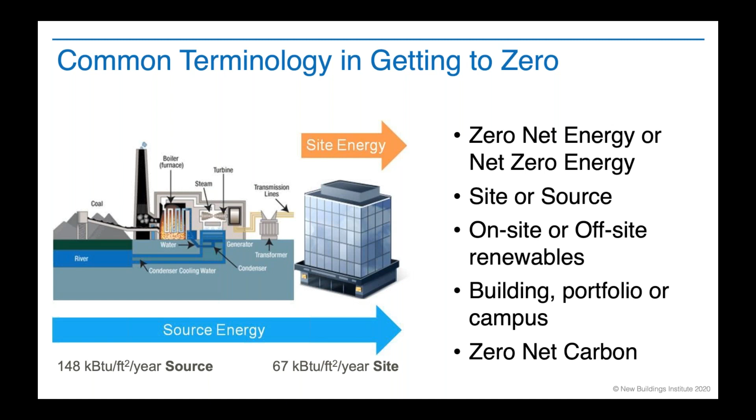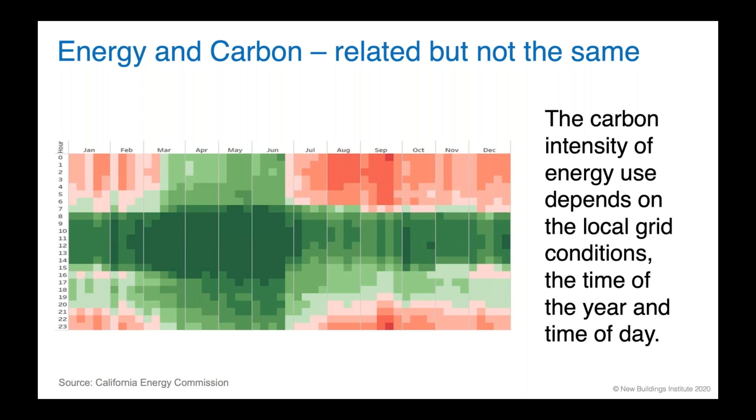The other thing that is important to know is that it's kind of a changing equation, because as utilities add renewables, especially renewables at the utility scale, it's going to continue to change the carbon intensity of that grid over time.

An example of this is shown in these two separate heat maps, one for a grid in 2020, and another for a predicted grid in 2030 if all the renewable portfolio standards are purchased out and the utilities do add the renewables as required. You see that in the top graph, the red is replaced with black, and there's still a fair amount of time with heavy carbon intensity on the grid. That will change over time, so this is going to continue to evolve and be a very dynamic thing.

But what we understand, and what research has consistently supported, is that energy efficiency continues to be a very cost-effective strategy that should be pursued in buildings. That's because, one, it makes the cost of renewables less, since you have to purchase less renewables. But also because of what in the utility efficiency industry has been called non-energy benefits.

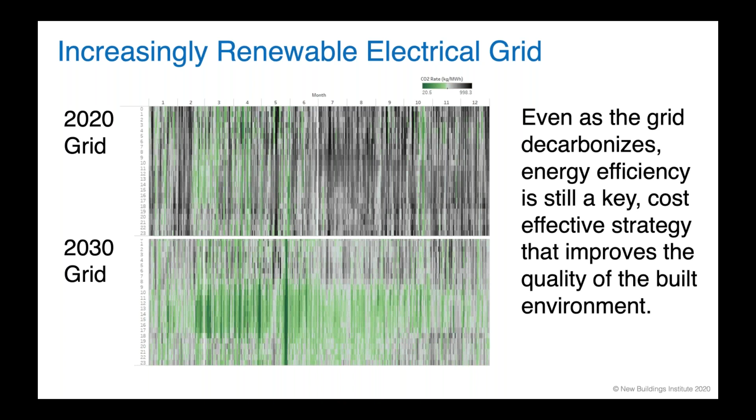So that was thinking about fuel consumption on the electricity side. But as we transition this conversation from zero energy, thinking about all fuels, to thinking about zero carbon, we want to think about the use of natural gas in buildings - that's an important thing to consider. Natural gas is primarily used in heating and hot water heating, and where it's used depends on where you are in the country, because it does vary by place.

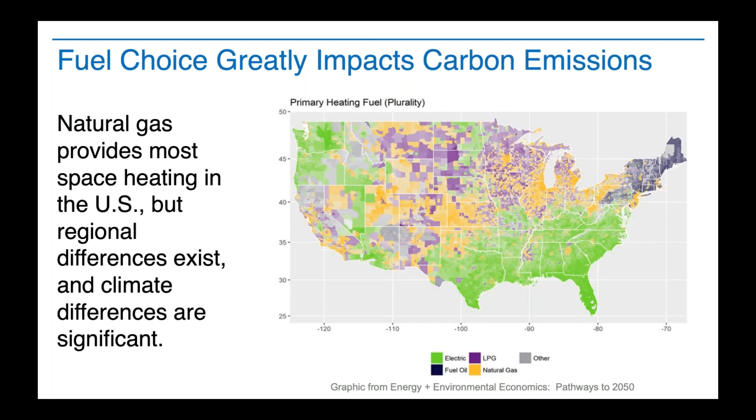In schools, if you think about where gas is used, it's a lot in boiler systems and space heating, but we also see natural gas use in kitchens, and that's another primary use that has to be considered in school districts.

So we wanted to take a quick look at some codes and policies in California that are really driving towards this decarbonization. California has a goal to decarbonize the building sector, and that goal is coming up pretty quickly.

They started back in 2008 with the California Energy Efficiency Strategic Plan, which set out goals to have all new residential zero energy by 2020, new commercial by 2030, and half of existing buildings being zero energy by 2030.

And to the California Energy Commission's credit, they set out the goal in 2008, and lo and behold, this year residential Title 24 really did take the residential energy code and require zero energy. They're marching along on this path to improve the energy code every 3 years until it does achieve zero energy. But like I said, energy and carbon are somewhat related, but not the same.

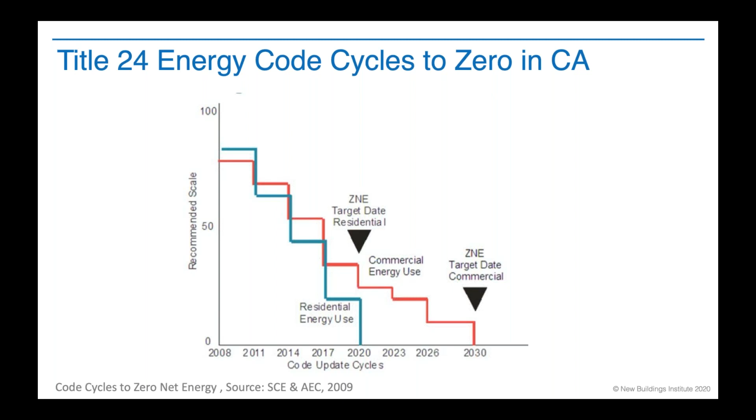So there are other cities within California who are moving even beyond Title 24. I've invited Sean Denniston, Senior Project Manager from New Buildings Institute, to talk about the San Jose REACH code, the electrification REACH code, which has requirements that will impact new school construction. In fact, all new construction, but it's important to note that some of what he'll discuss is really only about new construction. So Sean, I'm going to pass it off.

All right, thank you, Amy. So we're going to talk about San Jose's electrification REACH code. A REACH code is a code that sits above the base code, in this case Title 24. It includes a set of requirements that go beyond that code, but they are still requirements—everyone needs to do them.

In San Jose, the electrification REACH code is really a policy partnered with something else San Jose is doing, called a community choice aggregator. What it means is that all of the electricity provided to San Jose this year will be from carbon-free sources. That means electricity carbon consumption has been rapidly and drastically reduced, leaving the only carbon consumption in buildings in San Jose coming from natural gas. So the REACH code looks beyond efficiency, getting buildings to go all electric to leverage the carbon-free electricity available in San Jose.

I want to make a couple of points about the REACH code. There are a whole bunch of requirements that apply to all building types, and some requirements you may have heard about won't apply to schools—we're only going to talk about what applies to schools today. The other thing to note is the REACH code only applies to new buildings, not additions or alterations on existing buildings. Only new buildings. You don't need to worry about this for renovations or retrofits, even major renovations to schools—only new buildings.

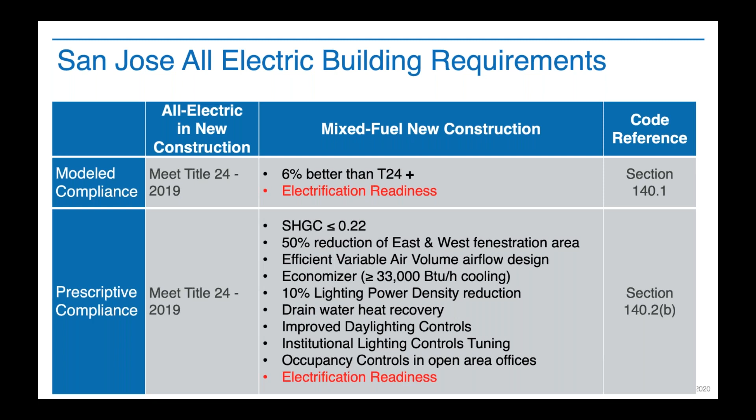So it really is just stepping up all kinds of building features. In addition to the efficiency, a mixed fuel building would also need to be electrification ready. What this means is that everywhere there is gas equipment, there also needs to be the electrical wiring to replace that gas equipment with electric equipment.

So here are two examples. These are from what you might see for a dryer, which you're probably not going to see much of in schools, but this is a good illustrative example. You have the gas line for the gas dryer, and then you have the plug with a circuit that goes all the way back to the electrical panel and all of the capacity at the electrical panel. So this is enough electricity available to power an electric dryer in the future.

This would apply to all kinds of gas loads, whether they're cooking, water heating, space heating, that all of these would have to have the electrical infrastructure in the building, the wiring, the capacity available to replace that gas equipment with electric in the future.

So you can see how these two pieces together, both the efficiency and the electrification readiness, give a really strong incentive to buildings to go ahead and electrify. And in the case of schools in San Jose, electrification is actually fairly straightforward because most of the loads in schools are relatively straightforward to electrify.

And in most cases, and schools are one of these cases, it's actually cheaper to build an all-electric building than it is to build a mixed fuel building, because once you take out those gas end uses, you can take out all that gas piping and that gas hookup, which means tremendous amount of cost savings upfront for schools under construction.

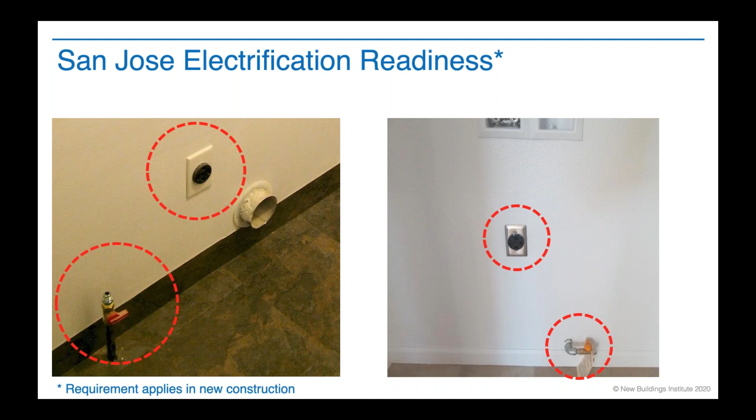Now, the next part of the electrification reach code is the electric vehicle charging infrastructure requirements. Again, these only apply to new buildings. So if you're doing a renovation in your parking lot, you might want to think about this, but you're not going to be required to do this in your parking lot.

Now, to talk about the requirements that are in the REACH code, we have to do a little bit of terminology first, because there are different kinds of electric vehicle spaces, and these are really meant to serve different purposes. The first kind is called an EV capable space. This is really just conduit that goes from the space to the electrical panel and a little bit of electrical capacity reserved at the panel.

This is a really forward-thinking requirement, that this is to avoid the future costs of an EV retrofit. Because if you think about adding electric vehicle charging to an existing parking lot, the biggest expense is actually retrenching the parking lot, tearing through your asphalt, digging trenches, and laying the conduit, putting everything back afterwards. So EV capable spaces are really looking at the future.

The second type of EV space is called an EV ready space. This has the actual wiring between the panel and the parking space. It terminates in either a junction box or a plug. And again, the capacity at the panel is reserved so that the charging can take place in the future. This would allow someone to come in with their own portable EV charger and plug it in. This is something that we see mostly in residential. This is not something that schools are really going to need to be concerned with.

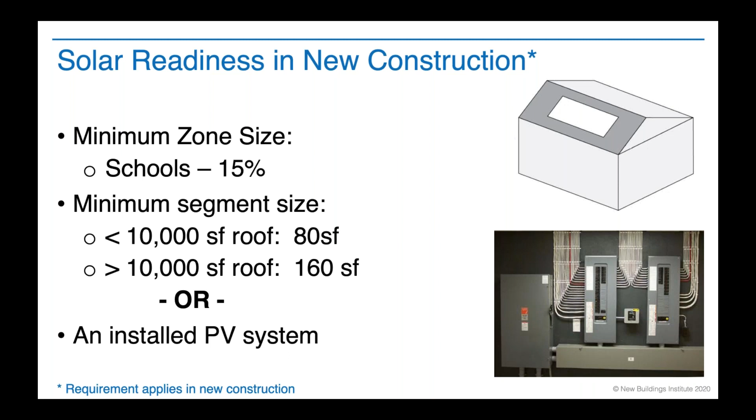Thanks, Sean. Okay, so with that quick intro to what the electrification REACH code is in San Jose, we're going to talk a little bit about the process that school districts are taking to get to zero over time.

So Rocky Mountain Institute dubbed this idea of zero over time, and really what they're talking about is this long-term strategic approach to energy management, one that sets measurable goals and then establishes policies and policy guidance documents to help achieve those goals. And we also know that in schools, it's really important to dovetail this long-term strategic plan with the focus on the benefits to the learning environment.

Because I know it seems obvious to say, but schools are about educating students. So we need to make sure that any work we're interested in doing to improve the energy performance, the carbon emissions reduction, that has to be integrated into the improvements to the learning environment.

Next slide. We have learned in our research that every successful project, every successful district has a champion. It is one commonality of all the zero energy projects that we know about. Oftentimes the zero hero, if you will, is on staff, but it doesn't have to be on staff. It can be a trusted consultant, whether that's a construction project manager or an architect, but we do know that there's someone there, and that someone is there to help establish goals and then to defend those goals and make sure that they're being considered all along the process.

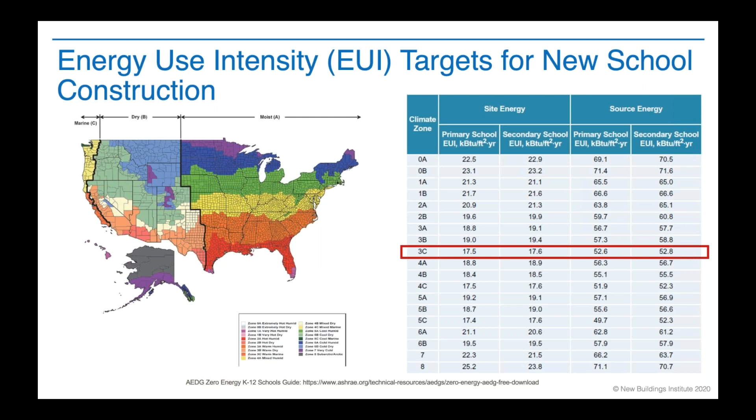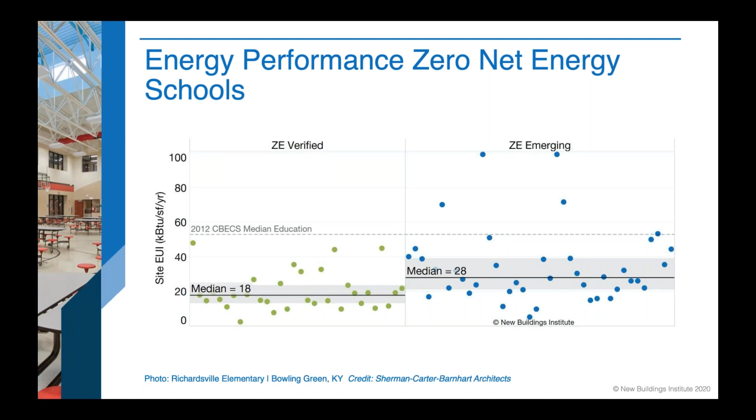School renovation targets - again, the second use case, major modernization. Their EUI targets may not be able to be as aggressive as new construction. Obviously you have an existing building shell, and there may be challenges making sure that shell is airtight, along with other challenges in renovations or major modernizations.

However, if it's really a major modernization and they're changing everything, I will say it looks a lot more like new construction than it does a modernization where the existing shell and all its challenges continue.

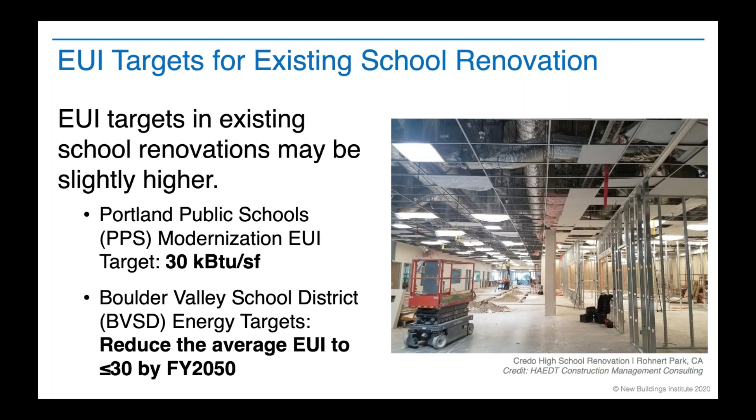So what we see in these successful districts is they have goals and they have policies. Usually the policies are instituted at the board level, but then they have guidance documents that help support the implementation of those policies. So an example is an owner's program requirements. An OPR is a narrative explanation of what a school district is looking for in new school construction.

And this is a place where you can use those EUI targets that we were talking about to have an explicit EUI target for whether it's new construction or major modernization. You can put that right in the owner's program requirements. So that's a really important policy guidance tool.

There are also just contractual documents, requests for proposals. When they go out with an EUI target, we see districts say, oh, we're interested in LEED Gold with an EUI of 18. So that's a way that you can incorporate this and make sure the design teams are on notice that energy and carbon reductions are a key part of strategies going forward.

Tech specs are another set of documents that defines what types of equipment is acceptable within school district portfolios. And if you have a carbon reduction or energy reduction goal, it's really important to make sure those tech specs are updated with the latest equipment, or the equipment that the district wants to see in that building, and make sure that equipment is going to meet the stringent energy performance requirements. Facility master plans is another common one that's used across the district, and we'll talk a little bit more about that at the end.

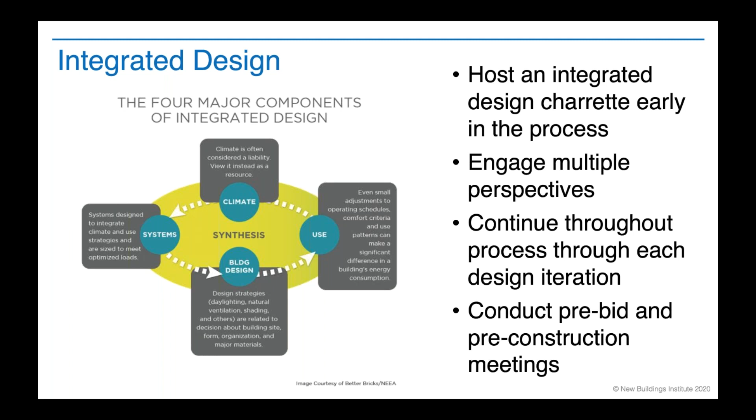The sustainability champion or the energy champion really should pay attention to certain key checkpoints throughout the new construction or major renovation process, making sure there's an early energy model and that it's revised at the end of each phase. That's a really good time for the sustainability champion to double check things are going on, because we know these folks are really busy, they have a lot going on. So we need to establish some key check-in points where they're consulted and they can say, yep, this project's on task.

Bring a commissioning agent. The districts that are successful at this firmly believe commissioning is well worth the money, and bringing the commissioning agent in during the design phase is really important. And then the other thing that we see about zero energy schools is mock-ups, and making sure that the contractors are doing mock-ups, because there's a lot of different trades that get involved, especially in building envelope construction. Making sure that's done in the right order and done in a very airtight way so that ventilation air can be delivered appropriately is super important.